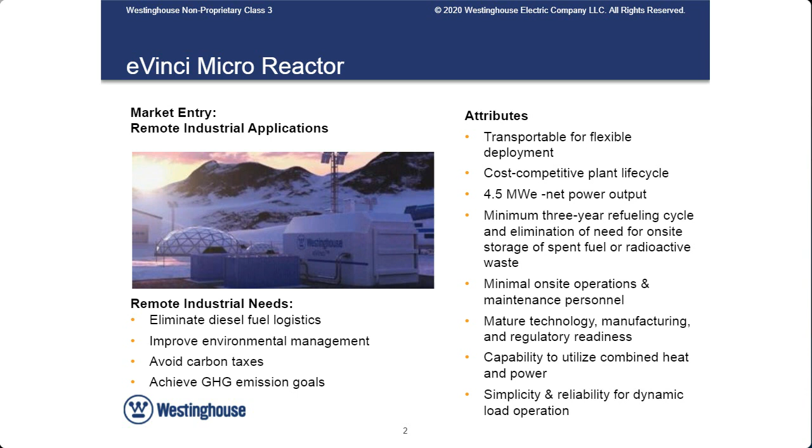So this slide, you see a cutaway of a heat pipe. And this is really one of the interesting pieces of the eVinci reactor technology. These heat pipes are filled with sodium. And through a natural circulation process, the sodium actually wicks the heat out of the reactor to the process side or the cold side, as you see in blue, where the heat is transferred in the primary heat exchanger for power conversion. So there is no forced flow in this reactor.

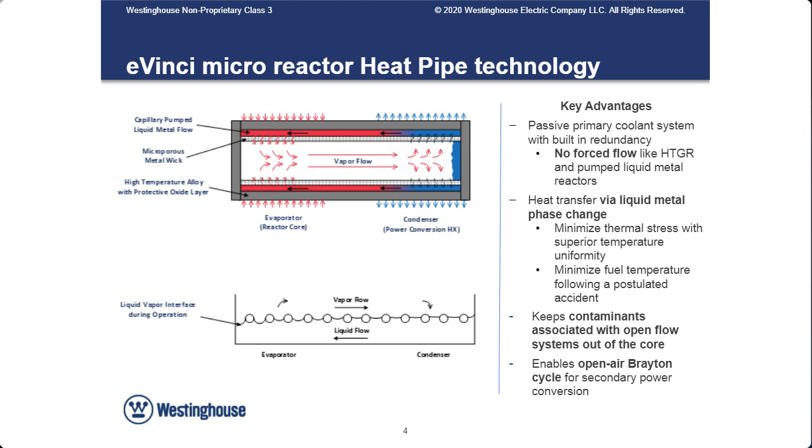So that allows a much simpler cycle, and it allows us to use a highly efficient power conversion cycle called an open air Brayton cycle. So this is one of the technologies we believe really sets our reactor apart from many of our competitors. And Westinghouse has done a substantial amount of manufacturing of heat pipes as well as testing of this technology.

Some of the markets for eVinci, as I've mentioned, remote mining, as well as industrial process heat. We can also supply district heating. We see power needs in remote communities where district heating can be used, developed in cogeneration situations. Any area of extreme resilience need, just given our ability to transport this reactor and quickly commission it. We also believe that disaster relief is also a potential market for this technology.

Currently, Westinghouse is performing a substantial battery of tests to further the technological readiness level of various components of the eVinci design. We're doing something right now called electrical demonstration, and that's going to drive us into a unit cell assembly test, which is really our first nuclear demonstration in 2022. And then the full-size nuclear demonstration we're planning to take place in 2025. This will drive us to commercial availability in late 2026 for the reactor technology.

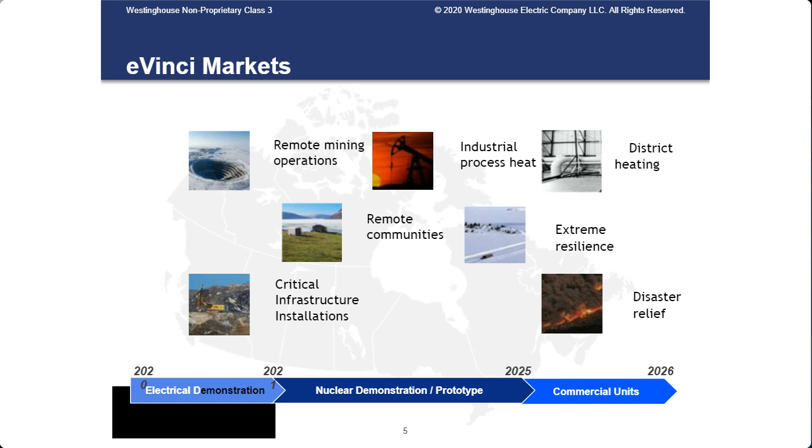So in summary, the eVinci microreactor can be put in a microgrid environment and paired with many different types of use cases. The eVinci can load follow on an extremely fast basis, such that it can pair with renewables such as wind and solar, which are generally intermittent type sources. So for instance, as a solar generating facility might ramp down in electrical output, the eVinci performs much like a battery and can immediately fill that demand need.

eVinci can also, as I've mentioned, generate all types of heating, which leads to many different process uses, which includes hydrogen generation.

Oil sands is an area that we believe the reactor can be deployed, as was mentioned by the initial presenter. And we also believe that the eVinci can really be deployed and can open up markets in Canada. You know, there's many areas, as most of you likely know, that cannot be accessed right now due to electrical power, on-grid power not being available in remote areas.

And the transportability of the eVinci microreactor really can, I think, drive quite a few markets that we haven't even conceptualized today. So as this technology moves forward, we really see just massive potential for eVinci helping to support global energy needs, as well as support Canada's drive to greenhouse gas emission reduction by 2050.

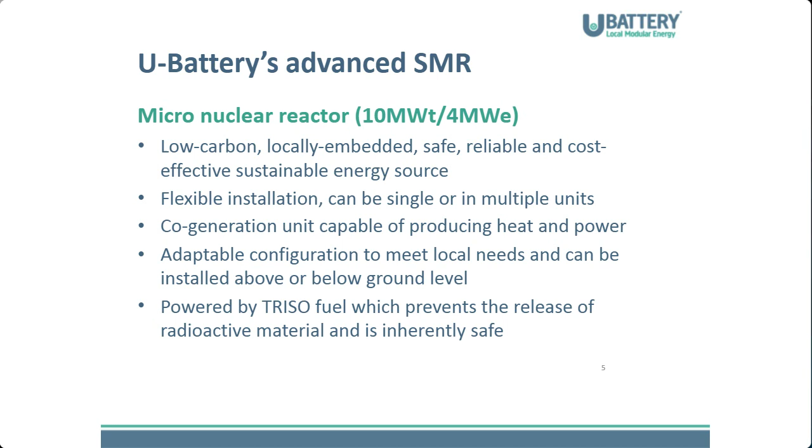So just to recap, a U-Battery is a low-carbon, locally embedded reactor. It's 10 megawatts thermal, or 4 megawatts electric. It uses accident-tolerant fuel, and it's adaptable to local configuration requirements, whether that means building in the far north, perhaps on tundra, or equally building in the UK on a traditional nuclear site or a process industry site.

Here is a schematic of what a U-Battery actually looks like, and it's quite obvious that it's quite different from the larger reactors in the sense that, as we were hearing from eVinci, this is a very small type of reactor, and our idea is to have a U-Battery available producing heat or electricity by 2028, and that first of a kind could be in Canada or it could be in the UK.

In Canada, as I mentioned, the typical first of a kind site might be Chalk River in the northern Ontario area, but equally it could be at our enrichment site. Urenco has an enrichment site in the northwest of England, just outside Chester, near the Welsh border, which would also be a demonstration site available to us.

If you look at the schematic, assuming you can see that, on the far left we have the turbine, and then going left to right, we have the heat exchanger, then the reactor itself, and then the fuel store.

And the idea is with the U-Battery is that you construct a U-Battery. The first of a kind we think is roughly a 3-year build program, but after that, when we get to the sort of nth of a kind, we envisage building a U-Battery in about 18 months. So very short construction period, because we're using modularization and advanced manufacturing techniques. So the idea is that it really is a product that's built at that site using modularization. So the construction period is significantly reduced.

And it can operate for 30 years is what we expect, with a refurbishment which could take it out to 60 years. Refueling cycles every 5 years, so that's the reason it's called a battery, in the sense it's plug and play, because you would install a U-Battery, and at the end of the useful life, if it was partnered with a mining site, for example, or a remote community, you might decide after 30 years that that's enough, and you simply remove the U-Battery.

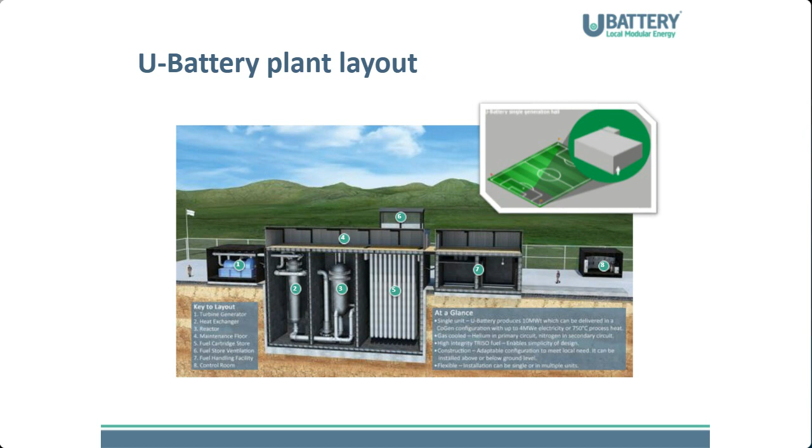In terms of the opportunity in Canada, as I mentioned, we see the diesel use that's currently happening with diesel being trucked in or flown in as being something where we can really potentially come and help industrial units, extractive industries or communities, get off diesel and have a sustainable future with a U-Battery, operating and producing high quality, high temperature heat or hydrogen or electricity, for a significant period of time and producing that in a very cost effective and efficient way.

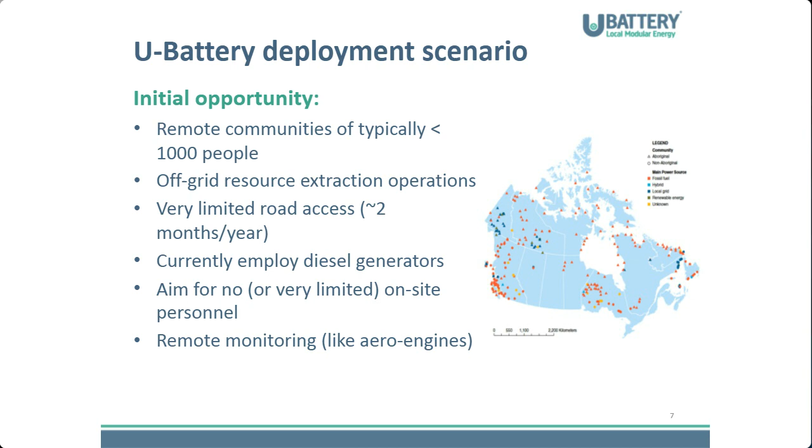So U-Battery has a variety of benefits, as I say, including low cost of electricity in remote communities, cost-effective energy supply for extractive industries. It can integrate nicely with microgrid networks. There are supply chain opportunities for Canada and for Alberta.

Canada is a first-rate nuclear country, and we really see this as an opportunity for getting involved with a Canadian innovation that then has a tremendous opportunity, not just for domestic deployment in Canada and the UK, but also internationally, because the advanced SMR market globally has been put at something like $250 billion from 2035 onwards, up to $400 billion. So there is an enormous opportunity there for Team Canada to be involved with this innovation. And that brings with it a range of potential benefits.

So as you can see from some of the graphics, self-sufficient communities as well as industrial operations being decarbonised, becoming sustainable, and I know that obviously Canada and Alberta is a natural resource powerhouse economy. So this is one way potentially of helping get those materials to market and opening up continuation of those mining sites, and perhaps allowing new mining sites to come on stream that can't be used at the moment, because of the lower cost of power that a U-Battery would produce.

It's not power for the grid. It's designed to provide heat and power locally for the community or the industrial application. There's a hydrogen opportunity, which is very significant with the new hydrogen economy we're all looking at. But if you think about outside of Europe and outside of North America, things like water desalination and potable water in the Gulf become realistic opportunities, as well as synthetic fuels for aviation.

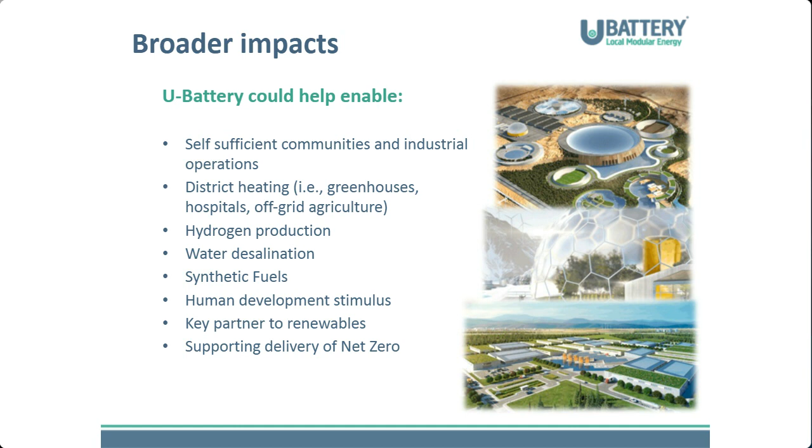As we look to get to jet zero with zero emissions being burnt in the aviation sector, this is a way of potentially generating synthetic fuels. It has human development stimulus opportunities, and it's a key partner to renewables because it integrates very well.

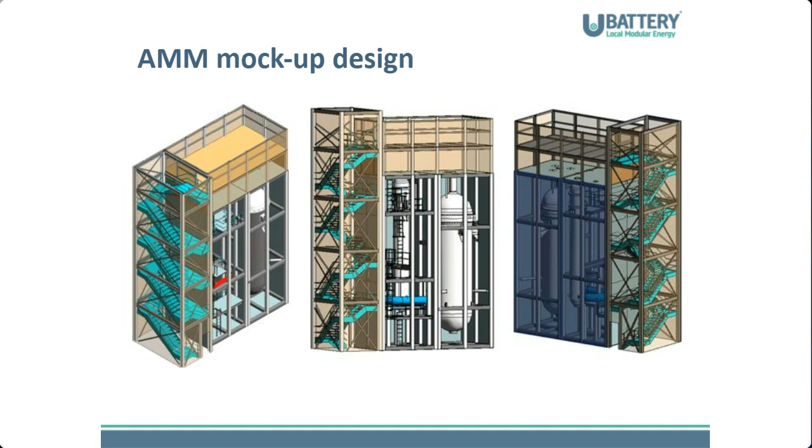Here are a couple of examples of our mock-up. So we are currently taking forward design, finalising our front-end engineering, and this is one of the things that's coming out of that, which is our reactor pressure vessel module. So this is a full-scale mock-up we're building right now, and this will complete in the late summer here in the UK, which will be a first demonstration of what an advanced SMR could look like, and what a U-Battery might feel like. So it will be something you can actually have a look at and actually touch.

It's installed, as I say, it's quite different from a gigawatt large-scale nuclear site. There is no big fence with 150 hectares or acres of ground. There's no large emergency planning zone. You don't see guards. What you see is a site that essentially looks like any other industrial building.

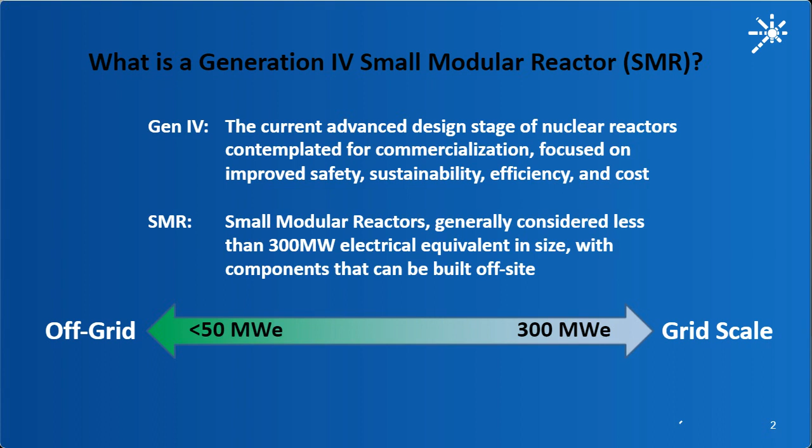So Ultra Safe Nuclear Corporation was formed 10 years ago, privately funded, $50 million US investment to date. USNC Power is our Canadian subsidiary. I'm based here in Canada, and USNC Power will be the developer, fabricator, supplier of the MMR reactor systems, and we're headquartered in Ottawa. The reactor technology itself is not really where the big innovation lies. It's a proven technology, but we're a developer as well of ceramic microencapsulated fuel. That's based on industry standard TRISO fuel, but it adds additional inherent safety elements.

The reactor itself does not need to be refueled for 20 years. So it's fabricated off-site, it's delivered to site, and it can run for 20 years without refueling. So you're mitigating spent fuel coming out, new fuel coming in, and in particular, if you're offsetting diesel, you're eliminating the significant cost and supply risk of fossil fuels. And in terms of licensing, we're in the second stage of CNSC's three-stage process, which is one of the leading technologies within the CNSC process.

So where are we going to meet the resource industry's energy needs? In 2020, we formed a joint venture with Ontario Power Generation called Global First Power. This joint venture is developing Canada's first SMR at Chalk River Laboratories. We're in the third of their four-stage process, which is a leading position in the process.

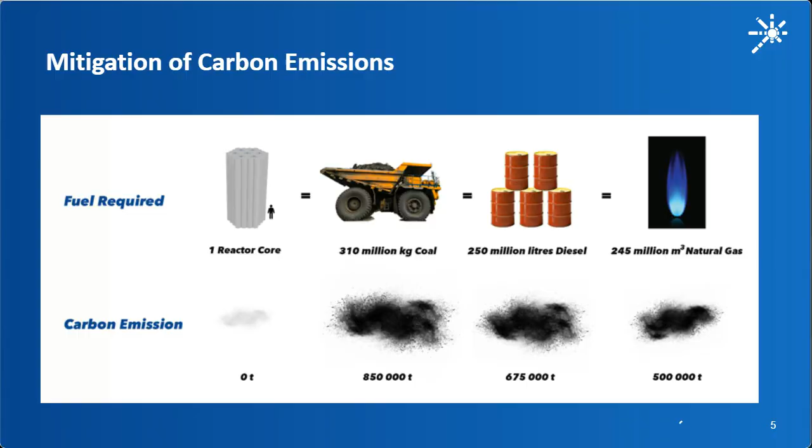So what is the reactor? It's a gas-cooled reactor. It uses helium as the coolant with our patented FCM fuel. Single unit, 15 megawatts, can produce 5 megawatts electrical in an adjacent plant. You could also use that heat for steam. Hydrogen production is a promising technology that's also emerging, thermochemical hydrogen production. And you can deploy multiple units to get more energy out of the same operation.

It is designed for cold and extreme conditions. Canada is our strategic market for the MMR, so that is already taken into consideration in the design of the modules. The modules are made to be transportable by road, by ship, similar to the other technologies that we've just been hearing about, and a fraction of the capital cost of traditional nuclear plants.

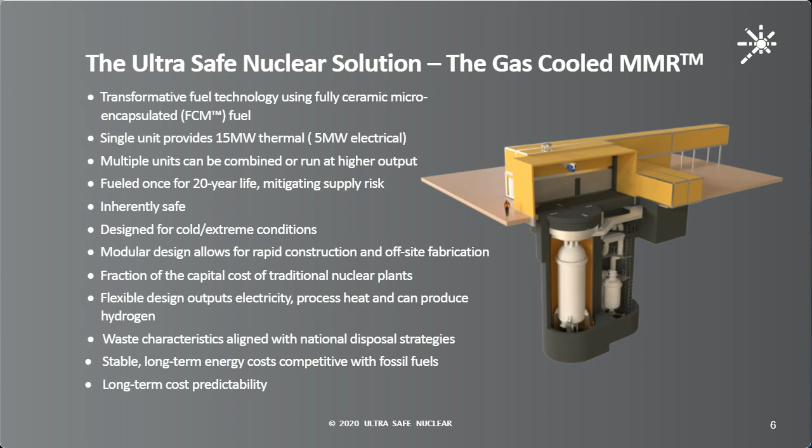This is what a typical plant layout would look like, and this contemplates electrical production. So on the left-hand side is a nuclear plant that considers 2 reactors. So this would be a 10 megawatt electrical or 30 megawatt thermal plant. The system incorporates a molten salt loop, which brings the energy from the nuclear plant into the adjacent plant, and it's non-radioactive. So the adjacent plant is not considered a nuclear facility.

So that could be electrical generation, hydrogen production, process heat, or any combination thereof. And the whole size of this, this is a fairly generous battery limit on here, but you're looking at 2 soccer fields footprint for the nuclear plant.

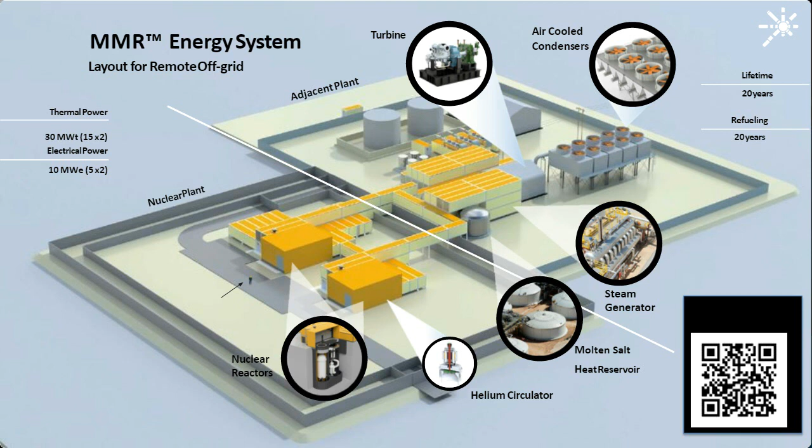I'll take a moment just to talk about where we're at in terms of our SMR projects. The question always is, when are they going to come available? We're looking at a scheduled date of 2026. We believe we can achieve that earlier. You'll often hear people saying that SMRs are 10 years away, 15 years away, decades away, and that simply just isn't true for all the technologies. Our technology and others are planning to be in the commercial arena ahead of 2030. We've signed a hosting agreement at the Chalk River site, which was a big milestone.

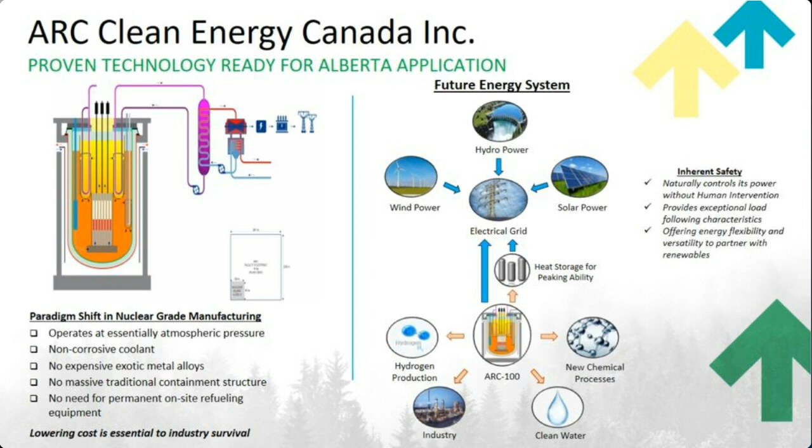The fueling options and the versatility of the little reactors: I mentioned it's 20 years, and it can be used in many ways. It can go directly from uranium mining into manufacturing fuel assemblies, and can run through at 20 years. But you can also recycle our fuel. So after 20 years, it's called a reconstitution. It's a process where you take out about 3% of the fission products that you'll have to take care of for a very short period of time relative to what it is today.

So you go from somewhere around 250,000 years to 250 years, but 97% of the fuel is reused in the reactor a second time, which is really amazing. So therefore, it's really a recycled type approach.

One of the advantages of our little reactor for New Brunswick is they do have used CANDU fuel. So we can even address that if it's asked of us; we can actually deal with the used fuel that's produced from a current CANDU reactor, or SMRs called Gen 3 pluses that will produce used fuel also. And that's important for Alberta, I believe.

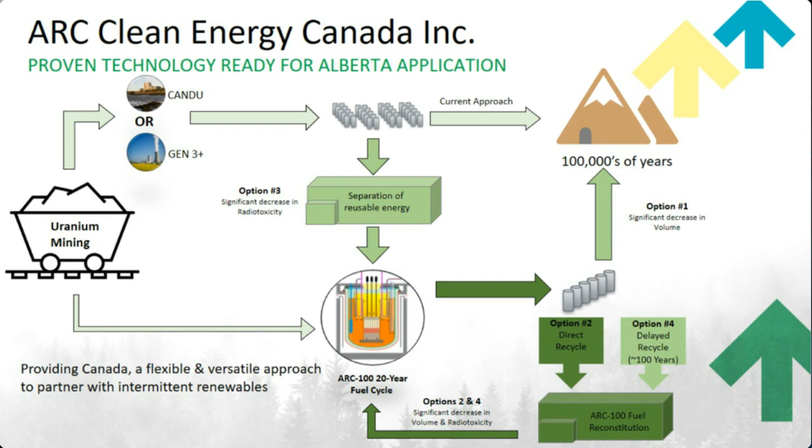Essentially, what this means is that if you compare the amount of used fuel that's produced in various types of technology. So on the left-hand side is called light water reactors, which is probably known as most of the U.S. models. We did a study, a tabletop exercise, where we compared 1 terawatt-hour of energy, which is roughly about 90,000 homes in New Brunswick here, in Saint John and Fredericton. The light water reactors would produce a little bit over 2.2, 2.3 tons of used fuel,

just pure weight. If you look at a CANDU reactor, something like we have here in New Brunswick today, they would produce around 17 tons of used fuel, where a once-through ARC 100 would be around 1.7 tons. And if you perform the reconstitution that I talked about earlier, it's a couple of 100 pounds. It's incredible. For 20 years of producing electricity, it really is astonishing how you can reduce the used fuel or the waste on the backside of the unit, which has been an issue for nuclear that needs to be addressed.

And as I mentioned, not all SMRs are the same. New Brunswick had a visionary approach where they dealt with the tail ends, and they picked, of course Moltex will be speaking after me, one of 2 technologies down here dealing with that. And I think that's the real advantage, and where the social license will bring nuclear is to deal with the waste issue, which our technology certainly addresses.

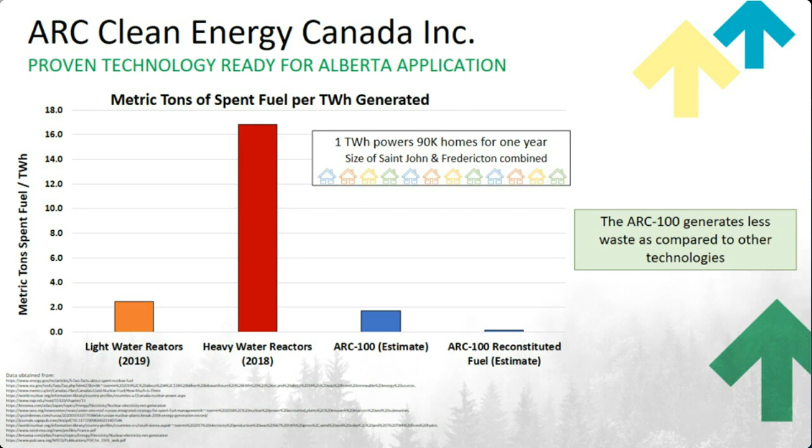Where we are today is essentially we've completed phase 1. We're only the second on-grid technology to complete phase 1 in Canada. We are now heading into phase 2. We're about ready to start that. We have just received, I hope everybody noticed it in the news lately, more support from the government of New Brunswick, a significant investment into our company, with matching funds from the private side, which brings us to the end of phase 2 when we're complete,

which means that we have line of sight now for the first of a kind, not a prototype, the prototype's already run. We have line of sight to the first of a kind ARC 100 in operation at the Point Lepreau site in the late 2020s. That means our market, our manufacturing capabilities and other things like that, we will be moving into in phase 2 of the vendor design review.

And New Brunswick has really put together a comprehensive climate change action policy, which nuclear is part of, and they're invested in proving clean energy technology, and it really demonstrates the necessary commitment to the private sector that these sorts of technology, much like most of the world experts believe today, we need nuclear to address the 2050 net zero goals. And so New Brunswick is really moving forward with that, which will be a benefit to all of Canada as we continue to ingrain ourselves here into the New Brunswick business community

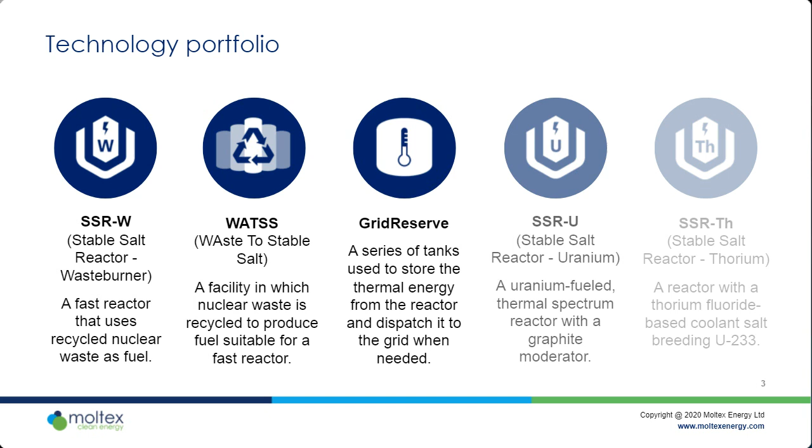I'm going to talk a bit about our technology, about our reactor, the waste burner, that uses recycled nuclear waste as its fuel, and then a bit about the process by which we recycle that waste. A number of people have already talked about thermal energy storage, so I will probably skip over that a bit. We do have other reactors on the drawing boards, but the waste burner is the highest priority and the one that we are developing first.

It's a phrase you've heard, no doubt, a Generation 4 reactor. Distinguished from existing nuclear technology, really because the main hazards of current nuclear technology just don't exist in this design and in other similar designs. And those hazards are very high contained pressures and radioactive gases as byproducts of the reaction. So if you've got radioactive gas under high pressure, you need to make absolutely sure it doesn't come out. And of course, that is exactly what the current nuclear industry does, extremely successfully, but at a high cost.

If you don't have those hazards, you don't need that containment and backup systems and active control and so forth, and therefore costs can be a lot lower. And I'll just give you one example. A reactor pressure vessel in a pressurized water reactor would be 30 centimeters thick, manufactured on site. Only a very small number of companies are capable of that level of manufacturing skill. The testing of it is astonishing, and that's because it's a big pressure cooker with some very hazardous contents.

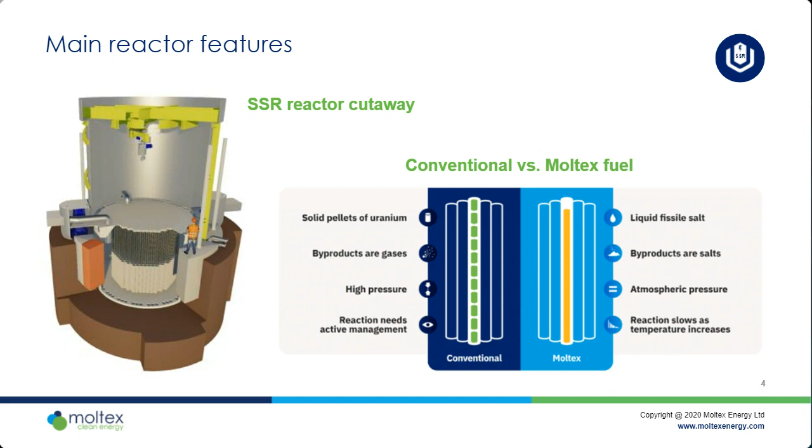The other thing we mentioned is that the reactor burns existing nuclear waste. So no mining, something that's well understood in Alberta, of course. In Canada, there are 14 gigawatts of CANDU reactors producing clean electricity. The waste from those reactors is currently intended for a deep geological repository somewhere in Ontario at a cost of about $25 billion. We can take that waste, we can recycle it, and that waste would be sufficient to power 6 gigawatts of Moltex reactors, generating much more clean electricity.

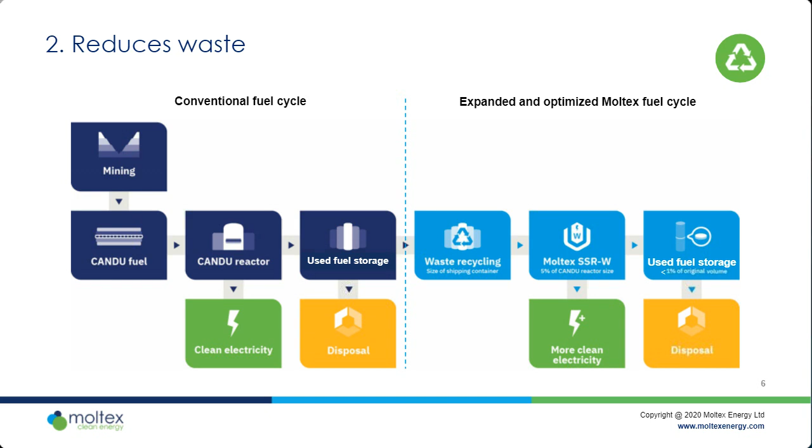Like a number of similar reactors, the heat that comes out is the right sort of temperature for thermal storage, which means rather than immediately generating power, you store the heat and generate the power when it's needed. The net effect of that is you can provide the power for maybe 60% of the time when the wind isn't blowing and allow renewables onto the grid. And so dispatchable nuclear power actually allows increased penetration of wind, solar and hydro.

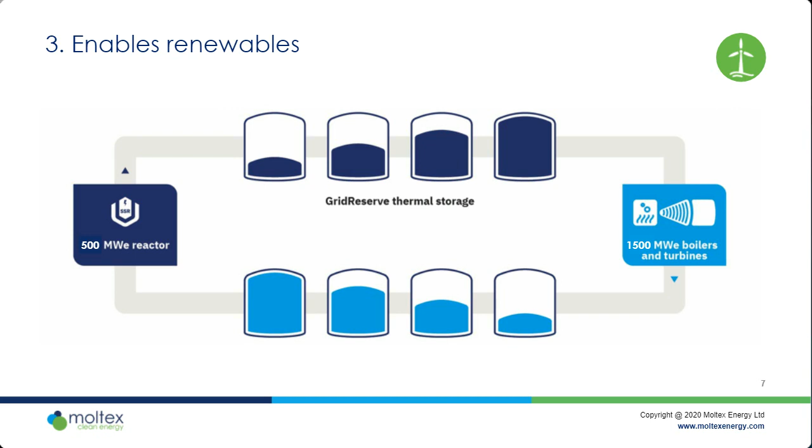The economics of which does get really interesting. I won't talk about that too much. Several people have mentioned cogeneration as well, and the uses of hydrogen as a vector for other elements of decarbonisation, because electricity is one thing, but a good deal of energy use is in other forms.

I mentioned that we have a second reactor on the drawing board, a thermal spectrum reactor called the SSR-U. That's a higher temperature output, and so it could be used directly for high temperature processes to make hydrogen. But the reactor that we are constructing at Point Lepreau, really the route by which that would produce hydrogen would be through low temperature electrolysis, i.e. through the fact that the electricity is low cost.

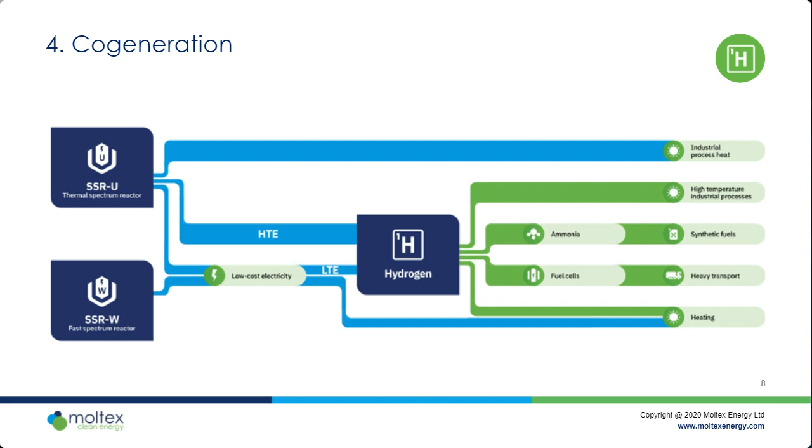So if I wanted you to remember four things about Moltex, one is its cost. And cost is really important. The world will only decarbonise when clean energy is cheaper than burning fossil fuels, and that's cheaper without carbon prices or subsidies or other forms of artificial market. So our absolute focus is on making this as cheap as it can possibly be. And that's based on its inherent safety.

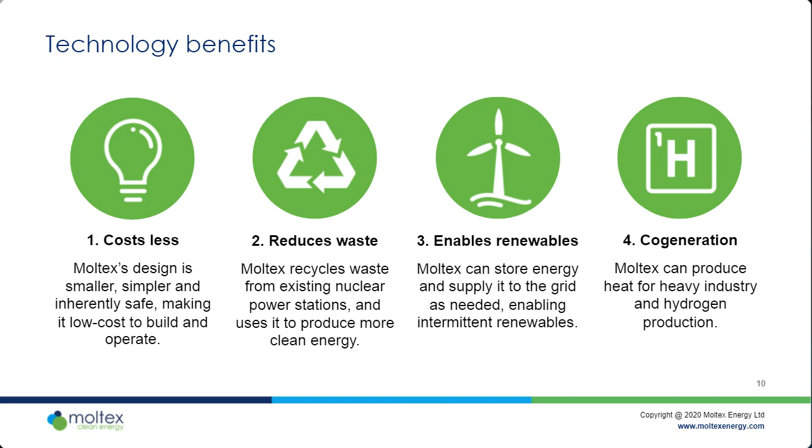Final point, I think, is one that everybody would make, is that hydrogen is a vector for fixing some of the other problems that net zero might bring us. And that, I think, is all I wanted to say.

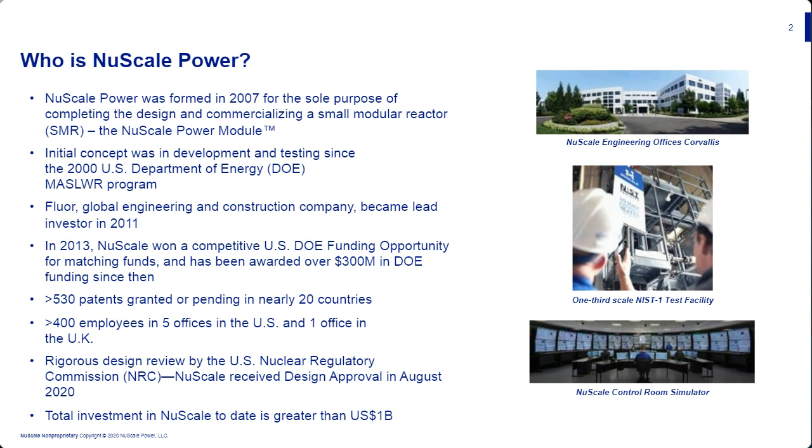So I won't go through all the details here, but you have the information in front of you, and I just did want to highlight that we've been at this for quite a while, and one of the most important elements of that effort is to develop the technology to get to the next slide, which is becoming the first SMR to undergo licensing in the U.S. And we gained that approval from the U.S. Nuclear Regulatory Commission in August of last year. Yes, even during COVID times, the NRC will work diligently to bring new technologies forth, and we've done that. I think the most important aspect of this is not just that we've gotten a license and that we're moving forward, but the bottom line is that the due diligence, the design, and the overall effort have come together to develop this technology and to bring it to fruition.

Frequently asked, so what is the SMR promise and when will it be available? Well, once you have a design license, it's available. We're moving forward and we're working on our first project, which will be implemented. We'll be delivering product from our factories in 2027 and working with the customer schedule. We'll be bringing the first NuScale power modules online in 2029. Like I said, I do want to say that that's per their schedule. We do have the ability to be delivering and constructing plants for the first commercial operation in 2027.

So what was the whole goal for NuScale and what we're trying to do? Clearly, with SMRs in general and with NuScale's technology, we wanted to focus on smarter, cleaner, safer, and more cost-competitive technology to deliver clean energy. So from a smarter perspective, we wanted to be able to provide a capability for a flexible operation for mission-critical facilities, and also to be able to integrate with renewables, et cetera.

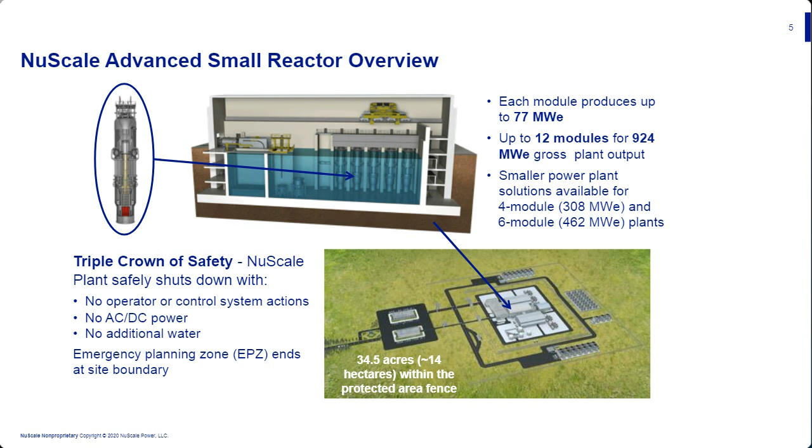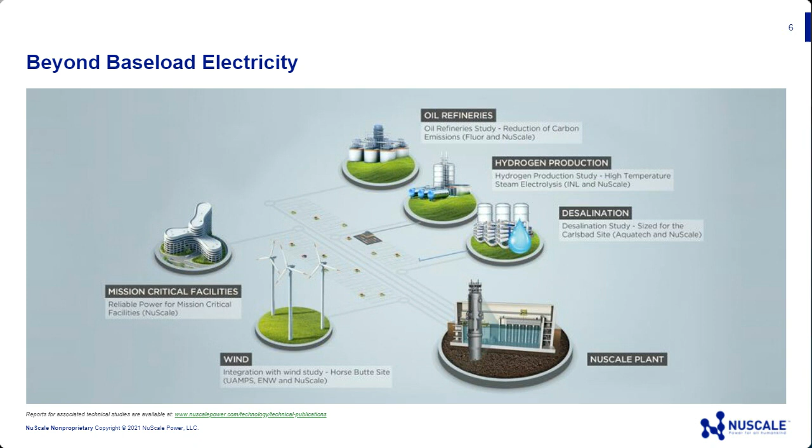I wanted to bring this to the forefront. We talk a lot about being able to integrate with renewables. We've done a lot of work with utilities and even some wind farms. And here's some of the information presented here. Sometimes I apologize, I always use the word important. What you want to take away from this page is that we have multiple functionality to provide for load following, to integrate on a grid with wind and solar, and to be able to fluctuate very easily and very timely to meet the overall grid needs. So there will be no gaps in clean energy production for a given need.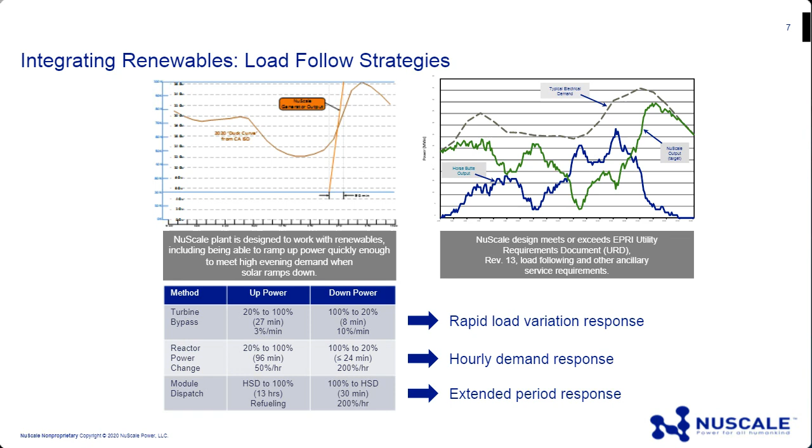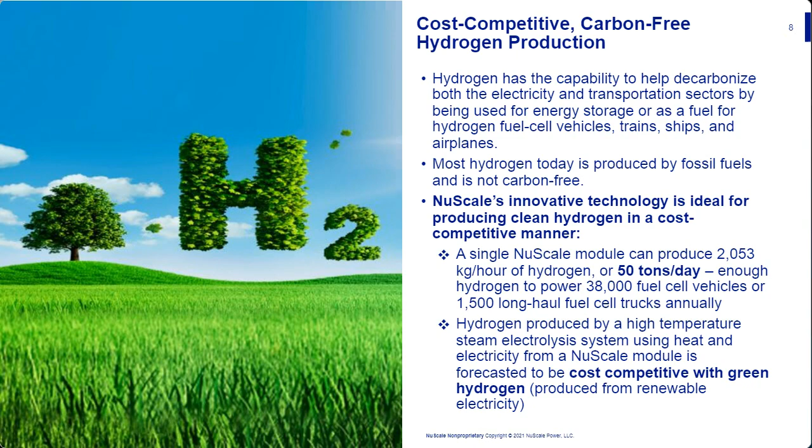I mentioned hydrogen production a few minutes ago. And just want to point out on this slide that a single NuScale module can produce over 2,000 kilograms per hour of hydrogen, or 50 tons per day. That's an impressive amount. I feel that we need to understand as a whole that hydrogen is going to be a big part of decarbonizing the transportation sector around the world. But I don't think it's well understood that to date, the focus is using carbon-based fuel for the energy production to support the hydrogen production. It kind of seems like it's not a net win there unless you go forward with SMRs to power that. That's my personal political statement for the day.

So following that statement on hydrogen production in general, you can see that this is becoming prevalent in the global community. Many countries have established hydrogen strategies and goals and plans. And we've talked with a number of folks in the UK, as an example, that are really trying to look how to go forward with their 10-point plan and manage it.

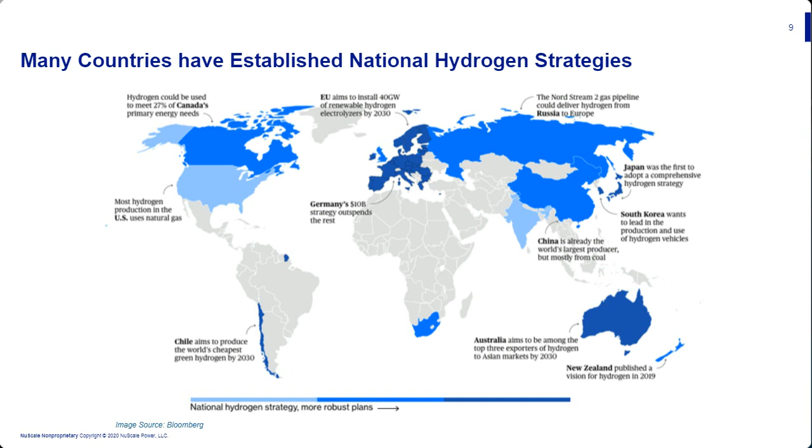And again, they're struggling with the concept that they want and need much more hydrogen production, but the strongest energy source for them to utilize today is coal. So it's not a win-win yet. And we're poised, I think, along with most of the others on this panel, to bring the technologies forth to support them to do that.

There are not a lot of resources required to manage this plant in the control room. What it does require is about 250 or so people to manage the overall plant for safe, effective production. I like to put that in there so people understand that when a NuScale plant is built in a community, it's not built for 10 people to work there. It's for about 250 to 300, which does depend upon regulations.

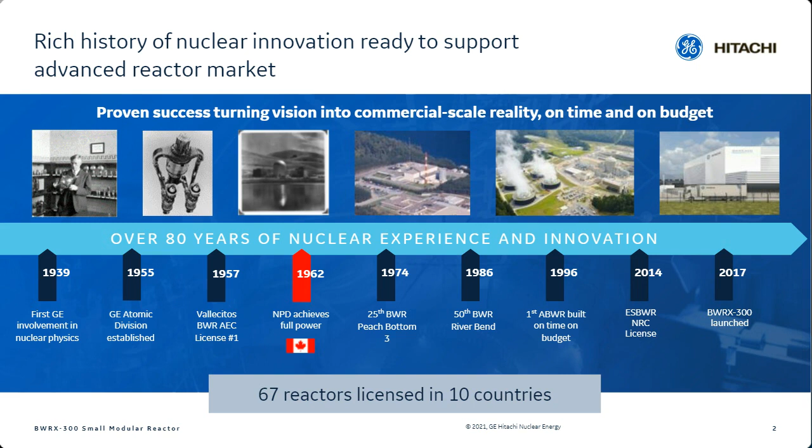When we're feeding the grid, we do have load following capabilities to partner well with renewable energies that are present in the grid today, to make sure that we match up with that. But also, as we look for that use of the steam, we can bypass all or part of it from the steam turbine making electricity to industrial applications. If we bypass it all, we could do things such as producing steam to drive district heating.

There's multiple locations in the world that have a very strong presence in that. We could also look at it as taking that steam and going through a heat exchanger and producing steam for, for example, oil sands there in Alberta to help with the extraction of the resources there.

And so there's certainly a variety of things to do with either pure electricity or pure steam environment for the BWRX 300, as well as if we integrate the two, where we produce some electricity and some steam and can balance the two very easily and on demand to meet a variety of applications such as desalination.

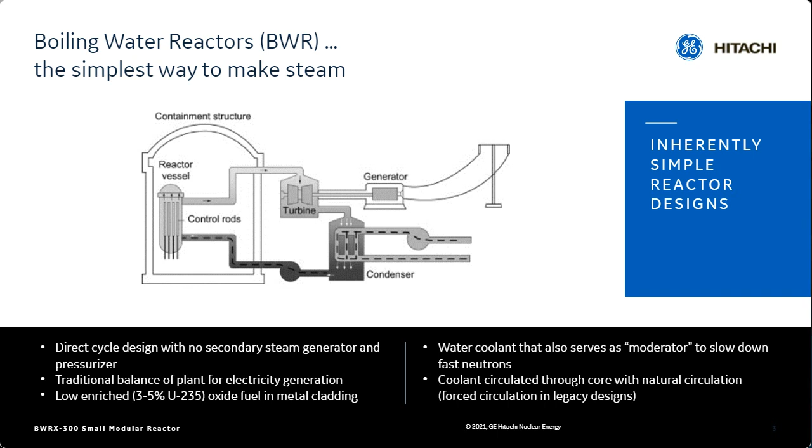And then Scott mentioned some of the hydrogen production. We can certainly take a combined electricity source and steam source to optimize on hydrogen. Our investigations into hydrogen really indicate that the lowest cost of electricity will be the winner in the SMR market for who can produce hydrogen the most efficiently. And so we're definitely taking a look at that and excited about that going forward.

As we looked at how to really break the barriers for cost that we've seen in the past nuclear power plants, we came up with the BWRX 300. It's a small modular reactor. It is our 10th generation reactor. And we've taken a lot of the lessons learned.

We looked at our past reactors, which some had forced cooling, forced circulation with recirculation pumps, not dissimilar to what you have in the CANDU reactors in Canada, and natural circulation. We settled on natural circulation to be the simplest about that. We also took a very close look at what our safety cases, our safety strategies were trying to tell us.

And with that, by moving the point of the isolation valves from containment to part of the vessel, we're able to have a major reduction in our LOCA strategy, loss of coolant, major improvement in our safety case. And with that, it drove a huge amount of simplification from a plant that was already relatively simple.

We're able to reduce our volume by quite a bit, on the order of about 90% on a per megawatt basis, which we'll touch on in just a minute, as well as implementing a wide variety of components that already represent our fleet today, that we know how to manufacture and we can bring to market very quickly.

We have licensing already started in Canada in the form of the vendor design review, as well as licensing topical reports in the United States, where the US NRC, Nuclear Regulatory Commission, is looking at individual aspects of the BWRX 300, comparing it to our past plants, and then able to make initial licensing determinations on those. Right now, we plan to be operational with our first plant, hopefully in Canada, in 2028.

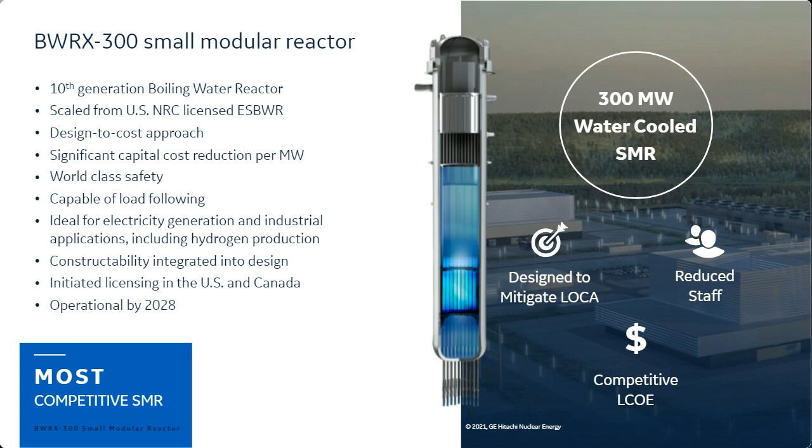A very unlikely event. However, past plants, past designs have focused a lot of effort on mitigating something that's very unlikely. With integrating those with the vessel, it changes the strategy. So instead of adding lots and lots of water, we can actually contain the water, not waste the water, keep it within the coolant system, and at the same time remove heat from the containment. And so all in all, it leads to a very simplified licensing strategy, as well as allows us to go for a very small plant based on the number of megawatts.

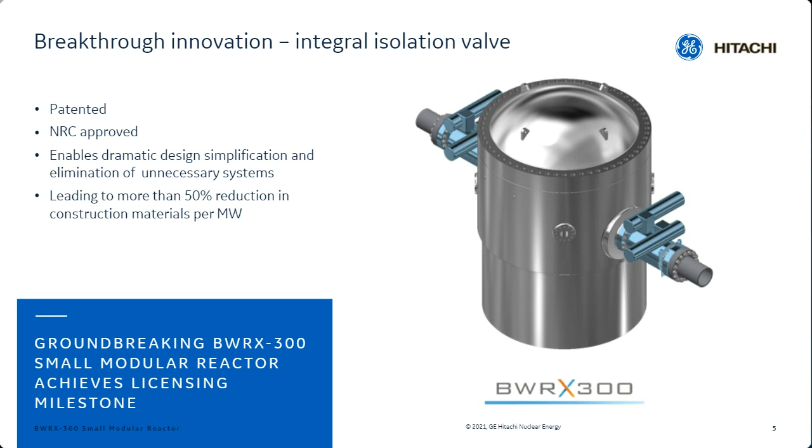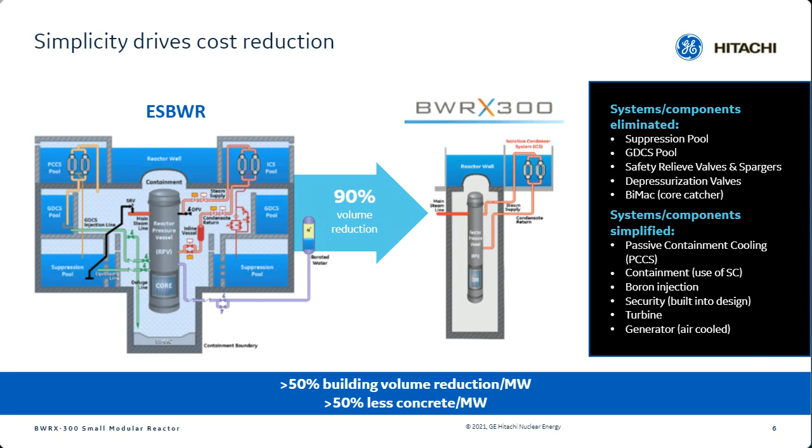From a deployment strategy, a significant amount of the technology being deployed in the BWRX 300 has operating experience. That goes from the reactor pressure vessel, if you will, the power module, which we've always had one module for our steam generation and steam conditioning for decades, and we're able to put that in one vessel and have it shipped to site.

Also, reactor internals are very similar. Our fuel is exactly the same fuel that is being deployed and used in the world today. We have a large licensing basis in multiple countries, and we'll start discussions with CNSC of how to bring that licensing basis, primarily from the US, but also Europe, into Canada and allow our fuel to be used there with effectively no changes. We're very excited about that.

Many other components, our nuclear instrumentation, all of these pieces have been deployed in the past. We're taking an evolutionary step with our reactor so that we know that we can come online, we have high confidence of operation, and we have a very high confidence in meeting our availability and capacity factor targets because we're making small changes, and in the 10th generation, we know how the plant is going to respond. We know the maintenance activities that are associated with it, and we're applying lessons learned and best practices from decades of operational experience for similar reactors.

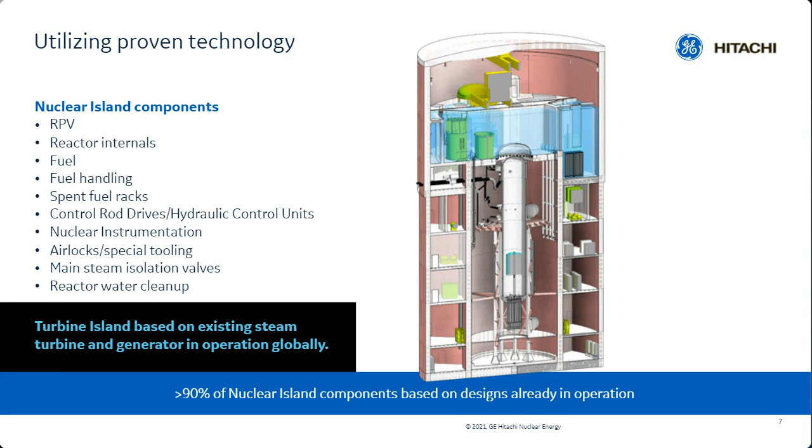Overall, in our safety case, we have the ability, in a design basis accident, to walk away from the plant. Not suggesting we do that, but no power, no operator action required for at least 7 days. We have a very small EPZ associated with that, as well. If anything beyond 7 days were to be necessary, it'd be very simple actions, filling a pool at approximately grade level with atmospheric conditioned water.

So it's effectively hooking up what you might consider a garden hose, or more formally using the FLEX equipment that nuclear power plants have today, very simple pumps and motors to achieve that water addition into the IC pools we can see here. Again, this would go for anything from a station blackout where you lose not only your offsite power, but any internal non-safety-related backup power generation. So it's very mild transients, and able to cope with any other design basis accidents for a minimum of 7 days.

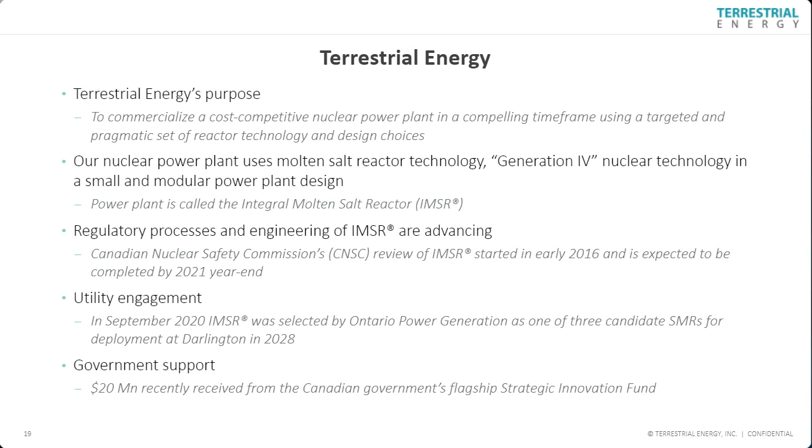The regulatory process and engineering of IMSR are both advancing. The Canadian Nuclear Safety Commission review of IMSR started early 2016, and that's expected to be completed by the end of this year. Our utility engagement took a step forward late last year when Ontario Power Generation selected 3 candidate SMRs for deployment at Darlington by 2028. Government support took a step forward as well when the Canadian government's flagship Strategic Innovation Fund invested 20 million Canadian dollars in our project. The IMSR genealogy and design choices.

IMSR genealogy and design choices give high technology readiness. The technology is based closely on molten salt reactor technology demonstrated at Oak Ridge National Lab. It builds on 60 years of Oak Ridge National Lab reactor design work and on many other demonstrated technologies.

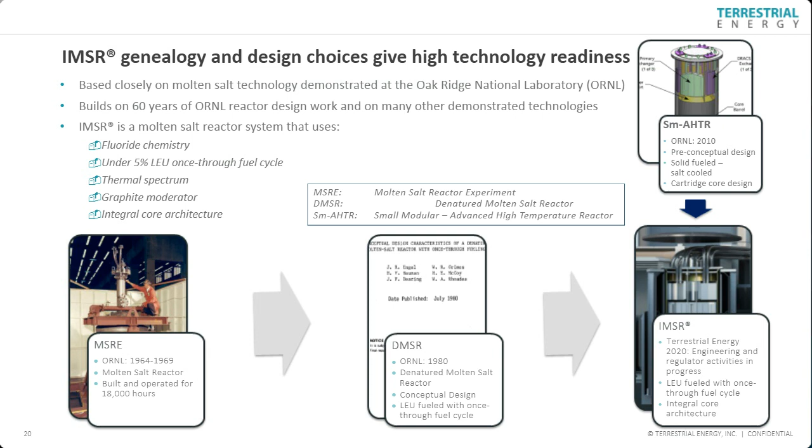The IMSR is a molten salt reactor system that uses a fluoride chemistry, a once-through fuel cycle using low-enriched uranium at standard enrichment. That's very important for operability over the near term. It's a thermal spectrum reactor system, graphite moderated, and it has an integral core architecture.

The key innovation is the replaceable IMSR core unit. This ensures industrial requirements of inherent safety, operational simplicity, and a 90% plus utility factor are achieved, and they're achieved by the integration of the primary reactor components, the reactor core, the moderator, the primary heat exchanger, and the pumps,

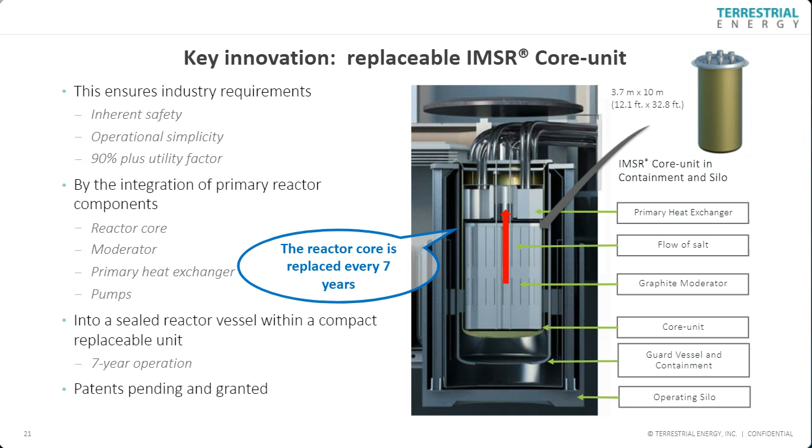into a sealed reactor vessel within a compact and replaceable unit that has an operating life of only 7 years, and then it is replaced with another core unit. On this key innovation, patents have been applied for, and in many jurisdictions, patents have been granted.

Nuclear technology and design choices have clear economic impacts. And I return to our purpose as a company. Our business purpose is a cost-competitive nuclear power plant. We achieve that purpose with 5 factors. These are the 5 factors that drive the cost of a nuclear power plant. They are size, construction method, temperature, pressure, and inherent safety.

So with respect to those five factors, size, we are small. We are designing this to be right size for the market opportunity, not too small, but right size. But we accept the fact that when you make a reactor small, you will make it more expensive. Fixed costs abound wherever you look in the nuclear industry. You make a reactor small, a power plant smaller, you will make the nuclear power more expensive.

We can offset that to some degree by incorporating into our design modularity and anticipating the use of modern factory-based construction methods to build those components and assemble them on site. So it is modular. But smallness and modularity, they're ubiquitous now in the industry. The exciting factors that drive the competitive position of a nuclear power plant are those in the generation 4 space, namely temperature, pressure, and inherent safety.

With respect to temperature, our system, being a generation 4 system, delivers heat at 600 degrees C. That enables us to have much, much higher thermal efficiency, 50% higher thermal efficiency compared to a generation 3 system, and by extension, 50% higher capital efficiency too, all other things being equal.

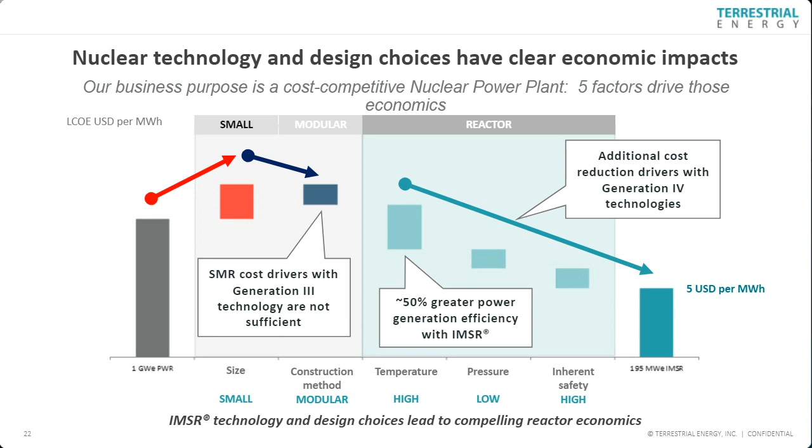IMSR is fundamentally an advanced heat source, and this defines its many uses. It uses a generation 4 technology. All of them operate hot, much hotter than generation 3 technologies. In our case, we can deliver heat at 600 degrees C. Yes, we can make electric power with 50% higher efficiency compared to a generation 3 system. And that's the first step for the deployment of this technology.

But we can also provide heat and power, thermal energy and electric power to many other industrial processes too. So you have a much broader opportunity for the deployment of your nuclear technology. And I'd like to talk about 2 of those opportunities in the remaining time I have. Firstly, hydrogen production, and secondly, natural resource extraction.

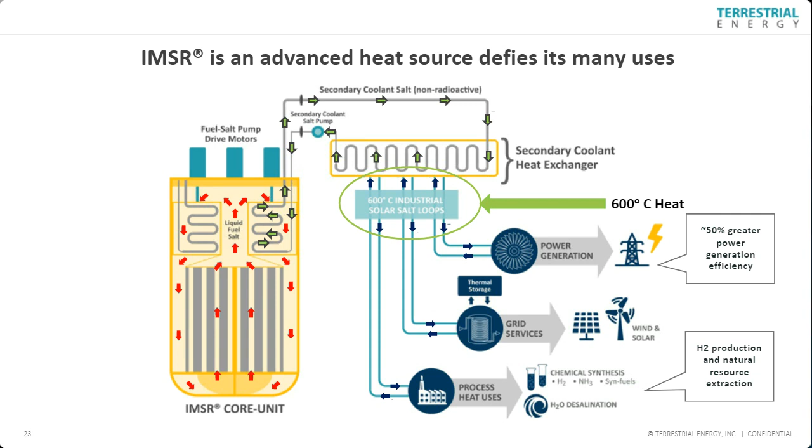So with respect to hydrogen production, clean, cost-competitive hydrogen requires a process that has a low total energy requirement, uses a low-cost source of clean energy, and, I'm sorry about the slide, it seems we've got a platform issue here, has the ability to sequester CO2, because it has to be zero carbon.

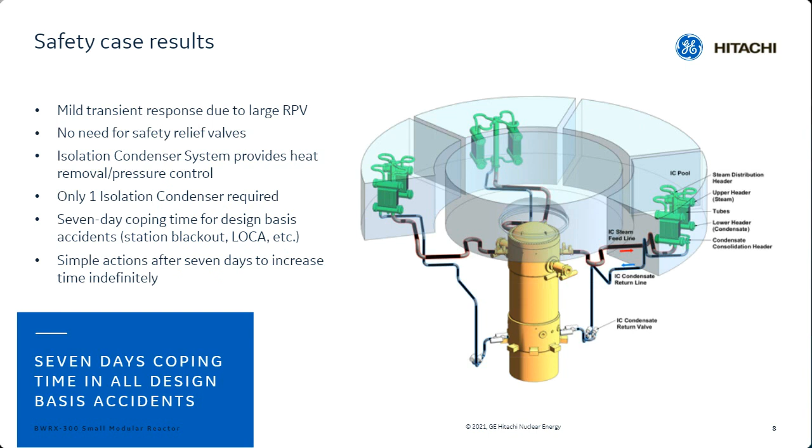Thank you, Maureen, and thank you to the organizers of the learning series, and to all my colleagues. I think we're all, in some ways, in this together. The slides are moving around. Okay. Do I have control? You should have. Okay, is somebody moving them? Because I'm trying to move them. But it's not working. It looks more like it's perhaps a feature of the system. So Catherine, maybe just give us a moment. All of the other presenters, if I can just ask that you do not touch the slides. It might have been Simon thinking he was still presenting. So let's just start again. Catherine, if you'll continue, please. Sure, no problem. So thank you, as I was saying. I'm sorry, I was curious with buttons, and I shouldn't have been touching anything while I wasn't presenting. Well, I found out soon enough.

This is a really incredible time. We are really at a crossroads, and you can see from the amazing technologies that are being presented.

There it goes again. Is it changing for everybody or just for me? The slides. It's changing for everybody. So one moment, Catherine. Let me get you reset back up here again. So Simon, if you are on and you can hear us, please know that we'll come back to you once Catherine is done presenting her slides. Thank you. Okay. Can I move them or will you move them? You should be able to move them, Catherine.

Okay, great. So I just want to give everybody a little bit of sense of what X-Energy as a company is doing. We are a company that designs Generation 4 reactors, high temperature gas reactors. I'll just speak, this is a little distracting. So we are designing high temperature gas reactors, and we currently have an award in the U.S. to complete our design and build a reactor under the ARDP program for operation in 2027 at a grid scale. We are designing grid scale reactors, a mobile reactor, and we also have reactors for space applications, nuclear thermal propulsion, as well as lunar surface fission power.

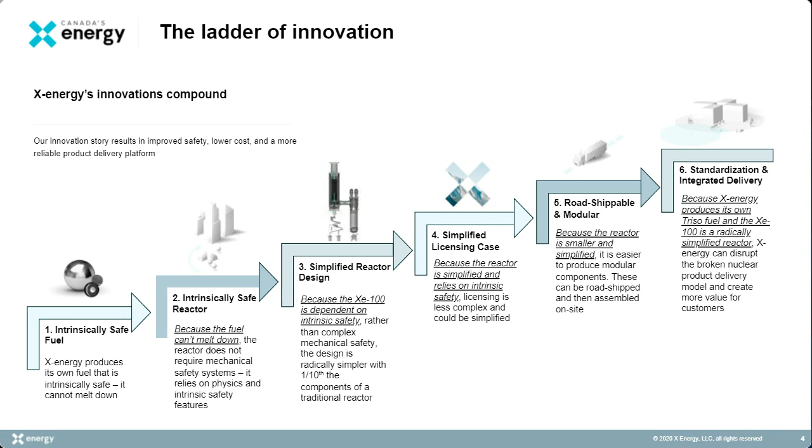That's where I wanted to be. And we also design and fabricate the fuel for these reactors. Our designs are all based on TRISO fuel, tristructural isotropic fuel, with a uranium oxycarbide fuel kernel. So I want to talk about the innovations that we've applied. The HTGR technology is not brand new. Like most of the technologies we've heard of today, it's based on years of development and in some cases application. Several reactors in the world have operated with this HTGR technology. So we've taken that technology and innovated. We started with the fuel, and it's changing again. I'm going to give up.

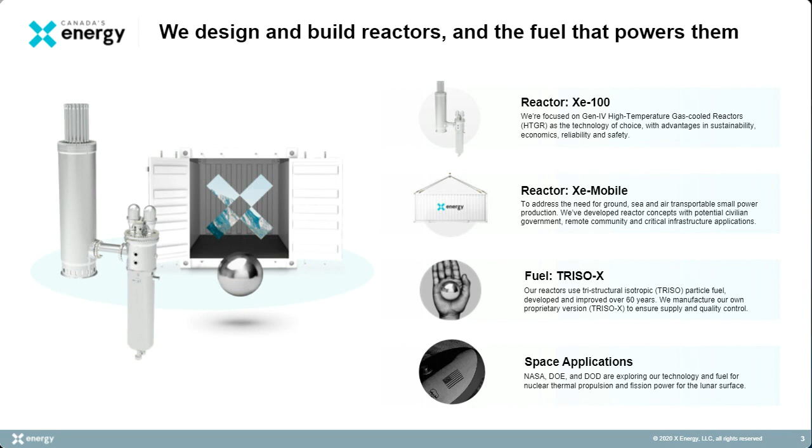The fuel is an intrinsically safe fuel. It's a very robust fuel. We start with the kernel. It's encased inside layers of ceramic coating, and in our case, for our grid scale reactor, we use it in a pebble form. However, it can also be used in a prismatic form, as some of the smaller reactors are. With the fuel itself, we've innovated to the point where we're producing fuel that is very homogeneous in its structure. It gives it better performance characteristics. What you see in front of you here are actual images. The first one is from a few decades ago from AVR and the fuel used in Germany. It was good for the time, but obviously not as good as it could be.

What you see with the Chinese reactor, with the HTR-10 fuel that's actually used right now, is a lot better than the German one. But then when you look at the innovations that we've put into developing our fuel, you see fuel that has an incredible uniformity. It's, I would say, almost perfect in terms of the spacing of those particles. This itself does give our fuel much better performance characteristics than were even seen in the previous incarnations of this technology. So these are the kind of things we're doing.

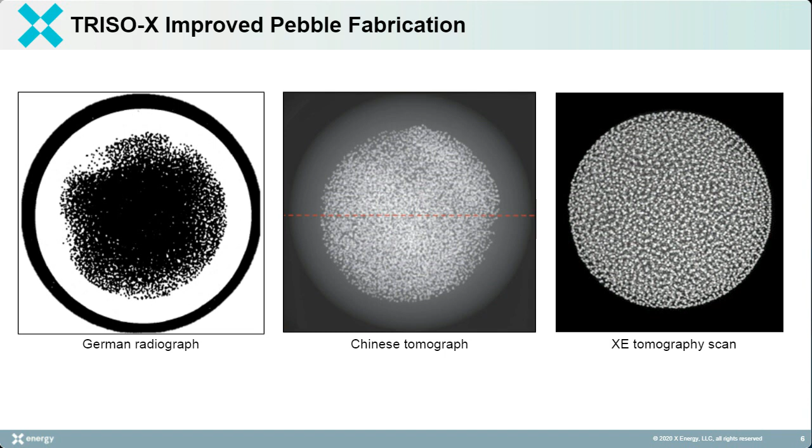And by improving our manufacturing and our design of the fuel, we're both increasing the safety, but we're also improving the cost effectiveness. We have less waste of the fuel material. From innovating on the fuel, the safety of the fuel lends itself to a safer reactor as well. And our reactors are intrinsically safe. They require no operator action, as many of the others. They also don't actually require any mechanical systems, neither active nor passive.

The reactor, through the physics itself, will just shut itself down. So there's no need for any kind of systems. The reactors are inherently safe by physics. This is quite important in that it gives credence to the idea of not having any emergency planning outside of the plant itself.

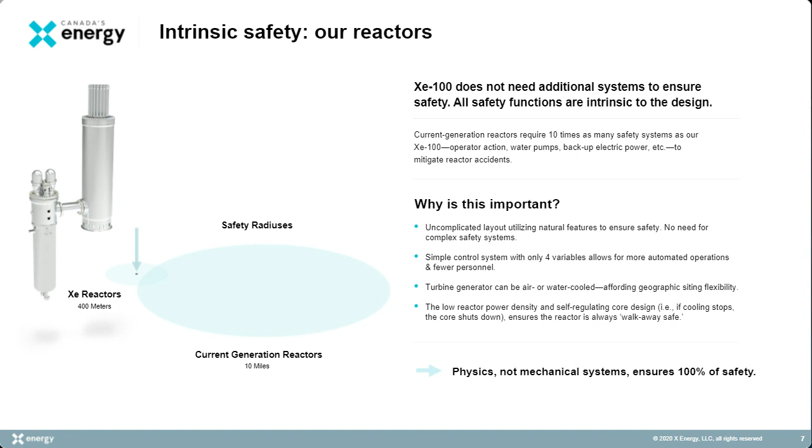The type of inherent safety also lends itself to a simpler design. We have a design that has 1/10 the number of components of most of our current power plants that we can compare to, and that simpler design, which is fundamental to all of the designs that you'll see in Generation 4 reactor technologies, really aids our safety case. It also aids our training of operators. It allows for modular construction and a whole slew of benefits of the simpler design and the safety of the design.

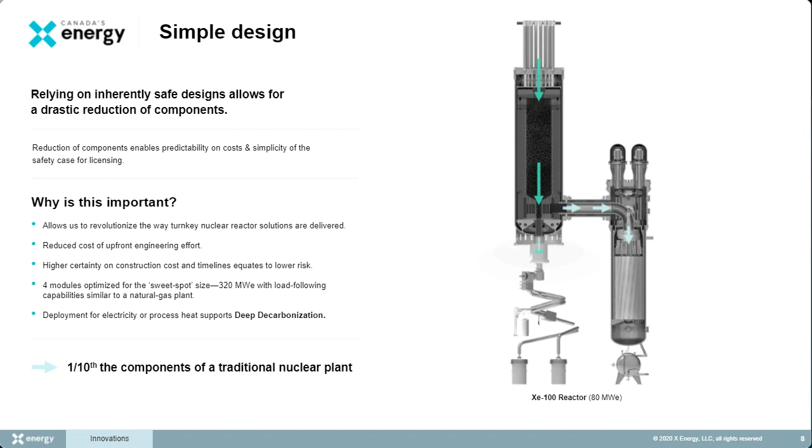We are in the middle of licensing, both in the US and in Canada. We're going through the VDR process, which is not licensing, but it is the pre-licensing activities to interact with our regulator here in Canada. So as I mentioned earlier, we do have a project in the US, the ARDP project. We're also hoping to be building it with OPG for operation in 2028, and both of those projects require much interaction with the regulators to ensure compliance with the regulatory systems in both cases. There's some cooperation between the regulators as well on HTGR technology.

For our units, along with safety and affordability and simplicity, one of the top level requirements is that the units can be factory built, modular, and road shippable. And the reason for this is our founder wanted these to address energy poverty as well as climate change. He's a philanthropist and aims to support some of the work he's doing in Central Africa as well as other parts of the world. And in order to achieve that, we need to be able to get these plants wherever they're needed. So road shippable is another high level requirement which we subscribe to.

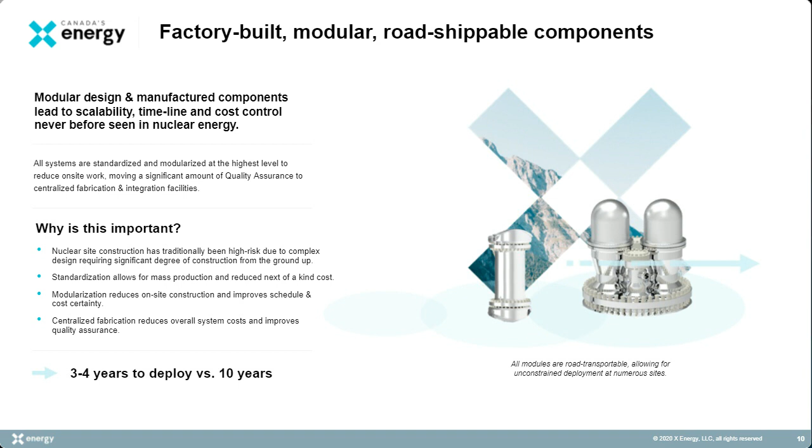That has really informed much of the work that we've done, and has informed the design work and the modularization of the components. The intention is to be able to construct these in much less time than previously done.

Like many of the other designs you've seen, this unit is highly flexible. It performs well as the fulcrum of an integrated energy system. It provides the baseload power that one would need in order to allow for a flexible energy system that uses wind or solar or other energy forms.

The graph you see on the side there, load following, the red line is the Xe-100. This is an actual simulation. The yellow line is solar. The green one is wind, and you can see the load is in blue. So the reactor will simply load follow up and down as the load is required.

It can change from 40% to 100% full power, changing at about 5% per minute. So within a very short time, 18 minutes, I think, or 12 minutes, it can go from 40 to 100 or down from 100 to 40. So it can readily load follow.

The unit, because of the high temperature steam, allows for process heat applications as far as hydrogen production. It can also deal with some of the new high temperature hydrogen processes that are being developed right now. So just for clarity, the helium comes out at 750 degrees C. The steam then comes out at 565 in our standard plant.

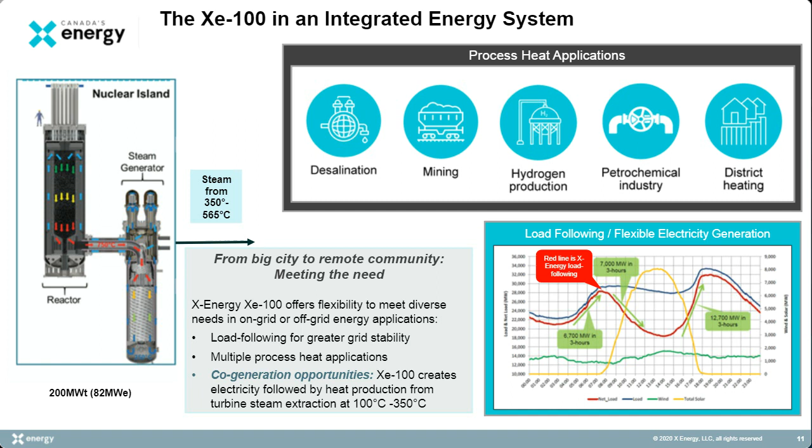And our standard plant is 320 megawatts electric from a 4-unit standard plant. But each unit itself is 82 megawatts electric, 200 megawatts thermal. There's no requirement to have the units as 4. It can be as 2.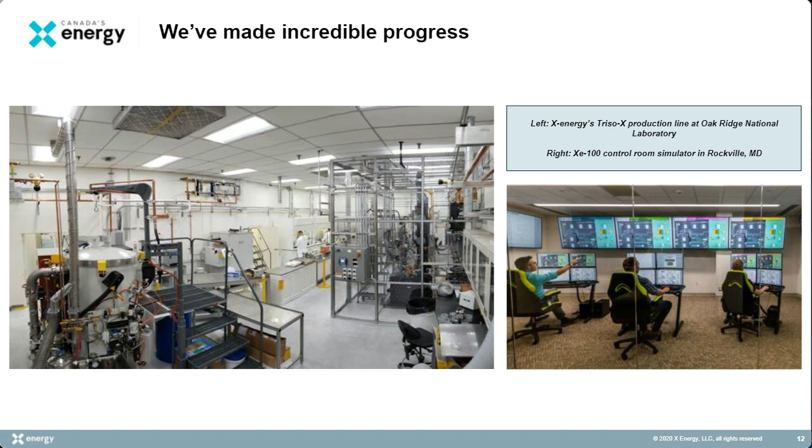And of course, here in Canada, Canada is extremely important. It's extremely important to me. I've been here for 35 years in the industry. Well, I've been here all my life, but for the industry, and just great opportunities right now moving forward with our close partners and vendors. This I will leave for people to just read as they want. I don't want to take up any more of your time. A lot of this is what I've just spoken about in terms of just a summary.

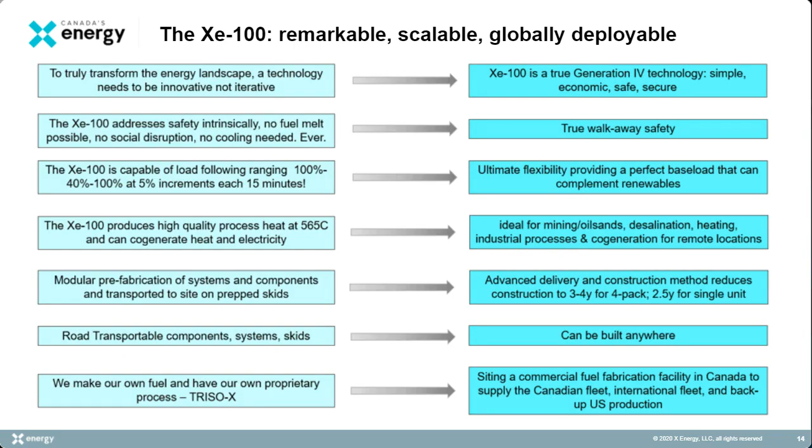So thank you for the time. I appreciate it. And thank you, Simon, for pinch hitting when I couldn't get my camera to work and things. Thank you, Catherine. And thank you so much for your patience in working with our technology and all the challenges. It was a great presentation in the end. So at this time, I do want to invite Simon back. He was, as you may recall, just previously chatting and getting into some of the case studies that he saw for their specific technology. And so, Simon, I'll now pass it back to you. Well, thank you, Maureen, and I apologise for the IT glitch mid-flow.

But I'll return to my first case study, hydrogen production. With respect to clean, cost-competitive hydrogen production, you need a process that has a total low energy requirement, and that energy requirement is met by a low-cost source of energy, and that it's clean. So you're able to sequester the carbon byproducts of that process.

As you consider that industrial process, it's important to remember that if you use water as a feedstock and are seeking to remove hydrogen from water, your energy budget is 5 times that of the energy budget required to remove hydrogen from methane. And since energy is effectively money, you're going to find it very, very difficult to compete with natural gas. But you still can use natural gas to make clean, cost-competitive hydrogen.

It's not just from a feedstock perspective, but if you have clean energy to drive that process, and if you have a simple, cost-competitive method to sequester the carbon, and if you use natural gas, you end up with a byproduct in 2 forms generally. One is gaseous CO2, and the other solid carbon. And they've got very different implications with respect to sequestering. But if you can deliver those three elements, you will get a clean, cost-competitive hydrogen in industrial scale.

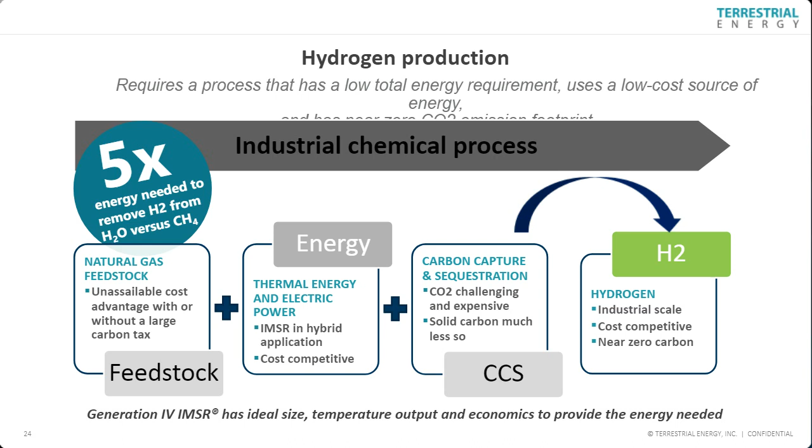So Maureen, next slide. It may be easier to ask you to change slides at this point.

Thank you. There are two industrial methods that use natural gas. The first one, steam methane reforming, that's the incumbent technology today. The challenge for that, with respect to my model from the previous slide, is that it emits gaseous CO2, and that's generally expensive and challenging to sequester, and sequestering tends to be very site-specific. But that's not the only method.

There's an alternative method, which is methane pyrolysis. In this case, you simply take the hydrogen chemically off the methane molecule, and the byproduct is solid carbon. Now, solid carbon is much more straightforward to sequester. From an economic perspective, it's more attractive as well. So it's not surprising that there's escalating interest in methane pyrolysis, as it uses natural gas as a feedstock, but solid carbon considerably eases the CCS challenges and costs.

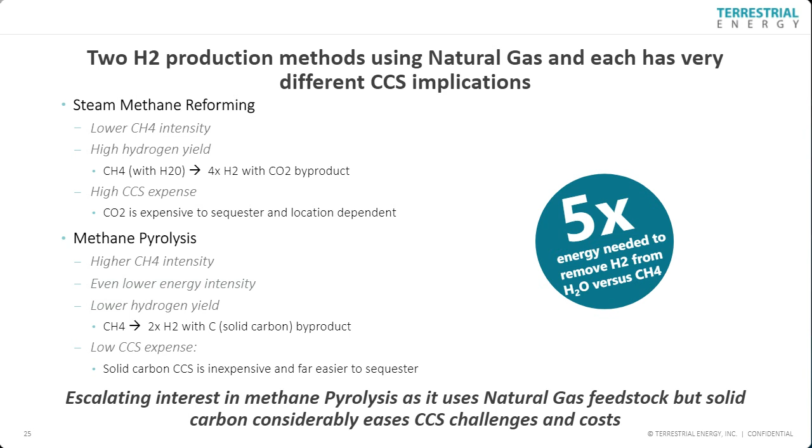My second example is in oil sands production. The standard method today in Alberta is SAGD, steam-assisted gravity drainage. That's the leading recovery method. However, because it uses natural gas combustion for the thermal energy to create the steam, it has a substantial CO2 footprint. Now, in terms of alternative sources of energy that are clean, Generation 3 nuclear cannot help. This has been studied already.

In 2003, the Canadian Energy Research Institute concluded that conventional nuclear, namely Generation 3 facilities, are too large, their steam pressures are too low and inflexible, and the steam that they generate cannot be transported far enough. These conclusions were echoed by a further study by the Petroleum Technology Alliance Canada in 2009.

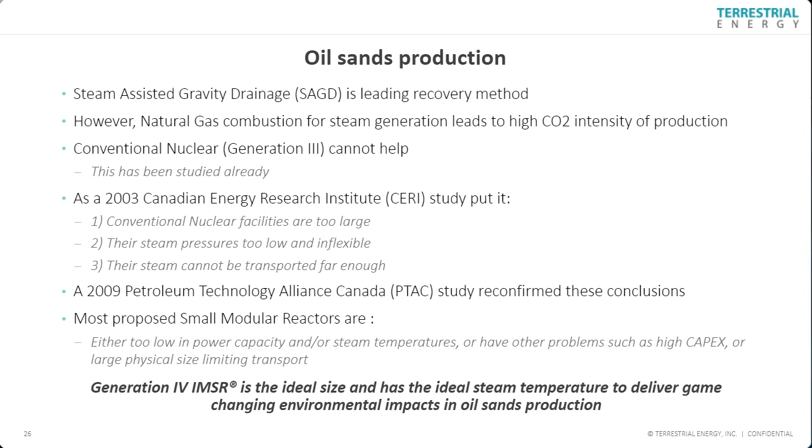They confirmed those conclusions. But because the Generation 4 IMSR system operates at a much higher temperature, it has the ideal size and the ideal steam temperature to deliver game-changing environmental impacts in oil sands production. It can be the industrial, baseload, reliable, cost-competitive source of energy to create the clean steam to support oil sands production.

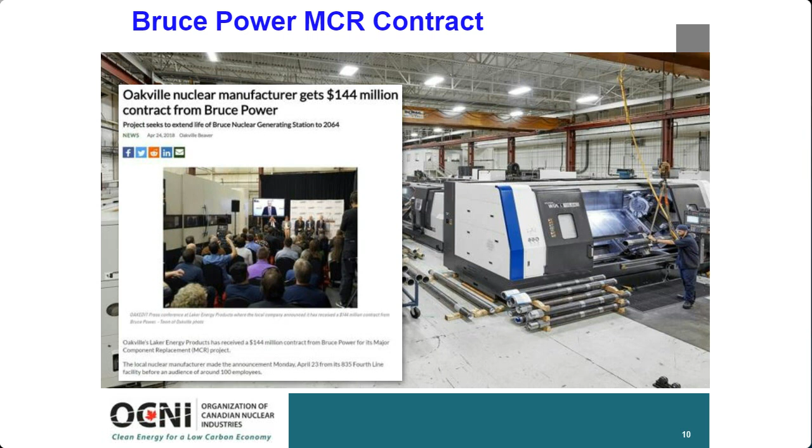So Laker was then faced with a decision. Should we move some of our manufacturing into the Bruce area to satisfy the requirement that Bruce has for localization? Or should we find a non-nuclear partner already established in the Bruce area? And I think you know the answer to that question. It is B. They found a partner called Akromold, located in Goderich, Ontario, that already had manufacturing capability, and they appeared to be well suited to pivot into the manufacture of the nuclear components. What they needed was some coaching, some collaboration with Laker Energy.

So Laker worked with Akromold to help them implement the quality assurance programs, and not only that, they audited them to ensure that they met 3 standards. And for those in Alberta who don't know these yet, you will as we get into the nuclear sector. CSA N285, which is a pressure boundary standard. CSA N299.4 is one of the standards on supplying quality components to the industry. And NCA 3800 is also a pressure boundary standard.

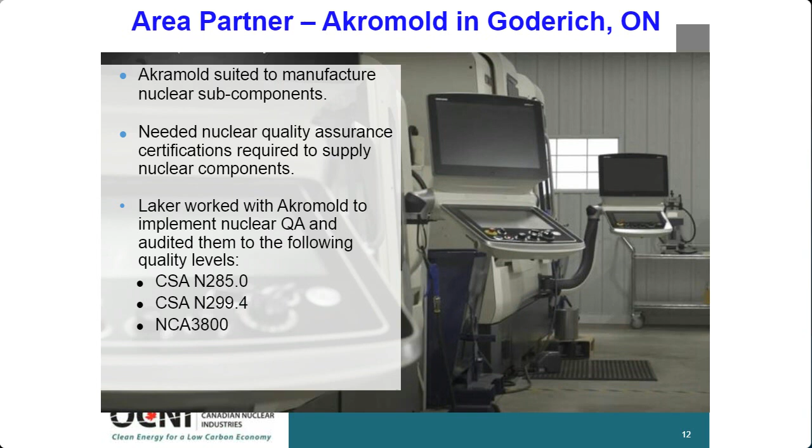So what happened? A successful partnership was established. Akromold and Laker opened up their second plant in Goderich to manufacture nuclear components for the nuclear industry. That's the role model that I would like to see replicated in Alberta. So as you said, we've got options for Alberta companies to enter the nuclear sector. You can partner with existing nuclear suppliers, which I think is the best route. They can help you acquire the skills and the QA programs for nuclear.

So Fit for Nuclear was a way that the UK government invested in a program to build a UK nuclear supply chain. So we can call ours Fit for Nuclear Alberta, and with collaboration from the Canadian government and Alberta governments, we will see what we can do to build that network in Alberta. A second option, or a part of that option, would be for some of the Alberta fabricators to leapfrog straight into some of the advanced manufacturing capabilities.

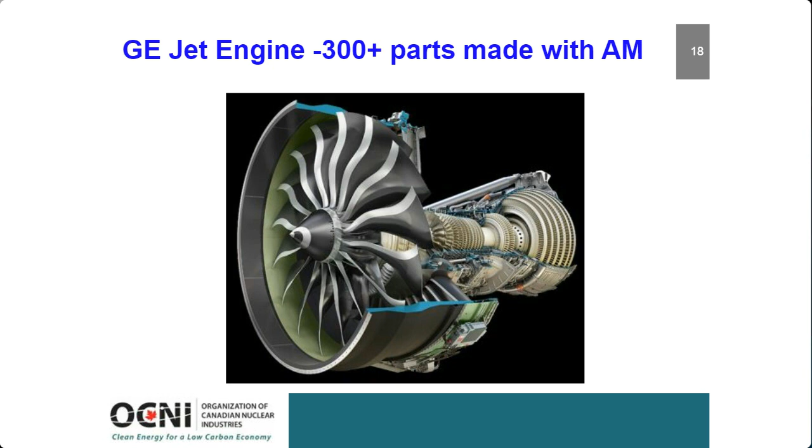You'll also see that in that workshop, we had a panel featuring all 9 SMR vendors once again, each of whom talked about their plans to evaluate advanced manufacturing methods, not only what we sometimes refer to as 3D printing, but various other binding technologies, welding technologies that have really revolutionized manufacturing and made it more cost competitive and faster. So I'm proud to say that the SMR developers, all of whom were on the call today, are all looking at advanced manufacturing technologies, and I would encourage Alberta Innovates and other forums in Alberta to look at how they can start to catapult Alberta straight into advanced manufacturing systems.

Our third action, OCNI 03, is promoting diversity and Indigenous engagement across the SMR workforce. So we've done this by signing a memorandum of understanding with the First Nations Power Authority, FNPA, an organization that specializes in helping Indigenous communities participate in energy projects on their Indigenous territories. So far, they've worked on projects related to small hydro, solar, and wind projects. But through this memorandum of understanding, we hope to leverage our experience in the nuclear sector, along with the First Nations Power Authority capabilities in those other sectors.